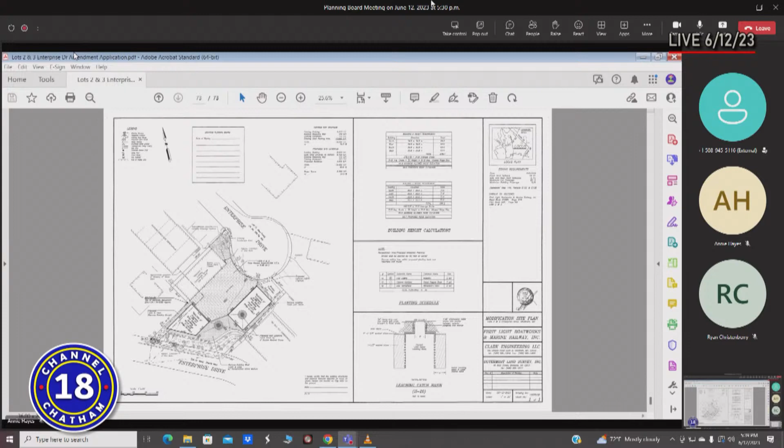I did provide drainage calculations. We are adding a couple of drainage structures because we're increasing the impervious nature of the entire lot, and those are strictly there to handle the runoff from the 2 new buildings.

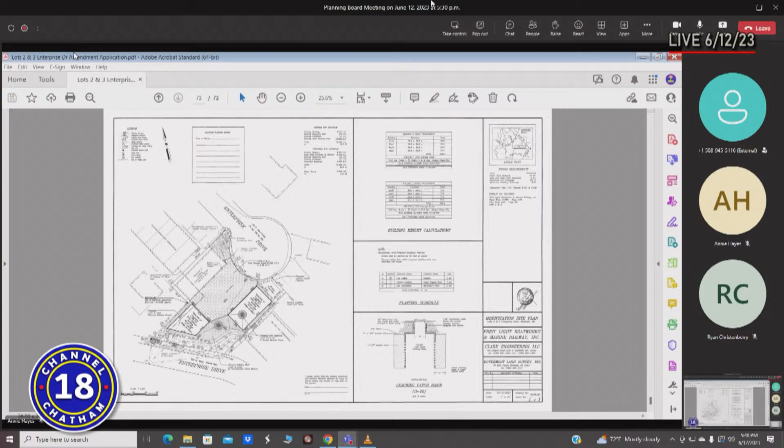I think I spelled out all the criteria in my cover letter, so I won't have to repeat that, I hope. But I'd be happy to answer questions, and again, Jim's here to answer any of the operational questions.

I see Bob Dubus has a question. I also have a question, but Bob, did you want to go ahead? All right, yes. Sorry, I keep forgetting, your letter was very complete and very much appreciated. I have a couple of questions, and then we'll see, there may be board members who have questions.

Could you just show us graphically, you made a comment that the building coverage is increasing because you're adding a building, but the lot coverage is decreasing because you've added the other lots. But can you just show us how that's working? I'd just like to see it really clearly.

And were these additional lots under the same ownership, correct? They must be, yeah. Yes, okay.

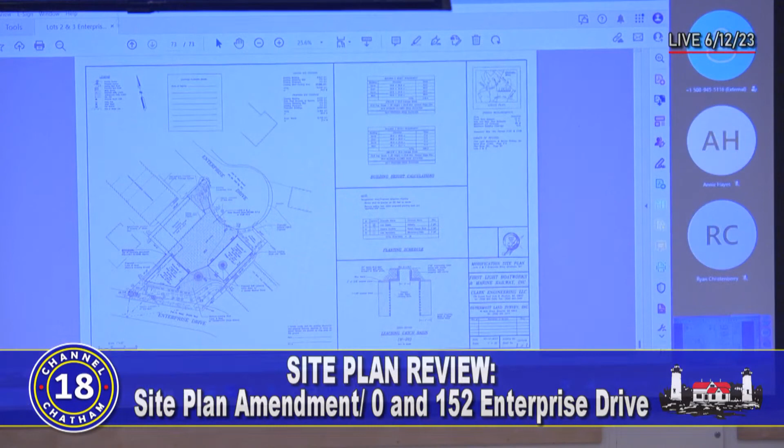So in the industrial district, there is no criteria for building coverage. Right. So there's the new building that's more than what was on the original site plan. All of this area was proposed to be gravel, and this boat rack is actually a little smaller, I believe, than what was on the original permitted plan.

This is the retaining wall that was installed. Due to the neighbor's building, they couldn't get that close to the property line and not undermine their site. So they got as close to Enterprise as they could, and as close to the neighbor on this side.

But can you just show me which are the two added lots that were not part of the plan before? The lot line is maybe not shown on the plan. I think it goes diagonally across. I can't remember, I might have the old site plan here. I didn't think I was imagining not seeing it. It's possible I imagined it, but I didn't think so. Just so I like to understand it, that's all.

The lot line goes there and then kind of to that building corner.

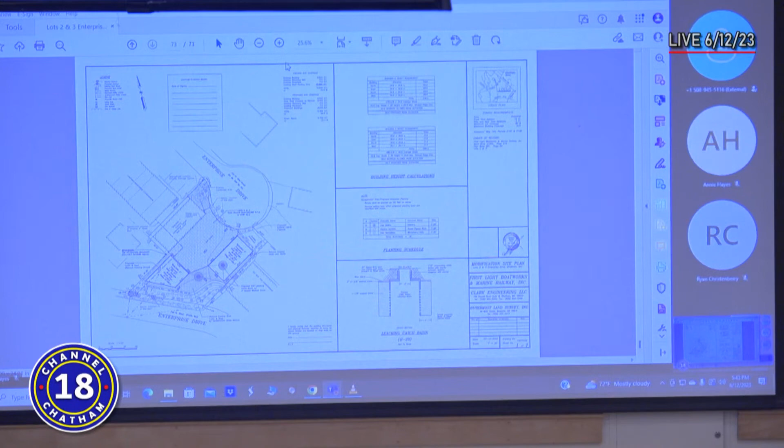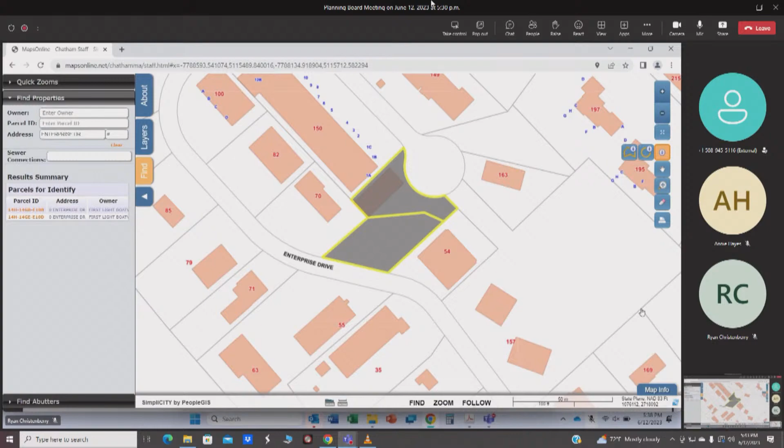I had another question. This is sort of a technicality, but I wanted to understand about the retaining wall, because you made a comment that it was not built according to what was shown on the original approved plan. If something is done differently than what was approved, we need to review that and give our approval now. So I just want to understand clearly what happened.

I can speak to that. If you want to put the plan back up - I didn't think I was involved when it was constructed, but I didn't think you needed permission to build a smaller retaining wall than what was approved. You actually do. Really? I think that's one of our standard conditions on every site plan, that any deviation from the approved plan means it's not the approved plan. So yes, that means you would need to come back to the planning board to get that change approved.

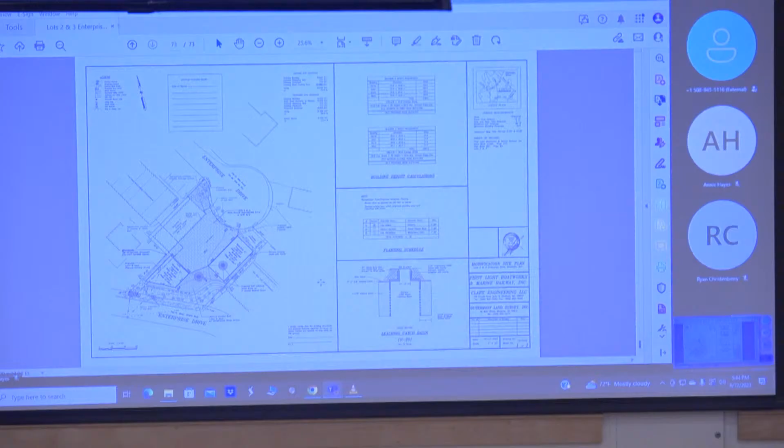We're talking right here in this corner. The original permitted plan showed the wall coming right to the property line here, and then following the property line to the north. At the time, when we were looking to do that, we basically moved the retaining wall further onto our property and further away from Enterprise Drive to make it less of an extreme situation. It was going to require a 20-foot sheet pile to hold up Enterprise Drive, and it was just too expensive. So at the time, I did speak with Jay Briggs about that, and he approved that change because we were moving it further away from the road and adding more green space.

So you did build the retaining wall, you just changed its location. Correct, somewhat. We basically built it as planned as far as the structure itself goes. Okay, all right, that helps.

Can I get other questions from the board? Bob Dubus, did you have questions? I'll let the board go through and see if some of mine are answered. Arthur, do you have questions?

I did go out and take a look at the site. The materials and the structure for the retaining wall are identical to the original plan. There was an alignment change on it, so, as part of our process here, we can incorporate that as part of an approval. Yes, I didn't see any issues with it. It's a very sound wall. Your stormwater is right up to date.

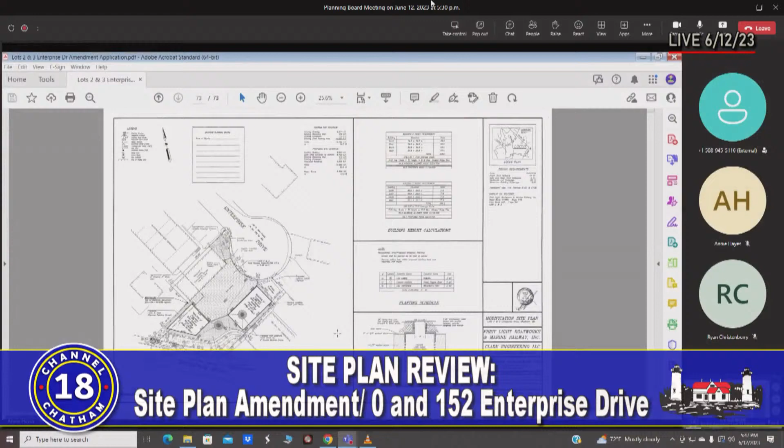When I was over there inspecting or looking around, notwithstanding the statement that there's no need for parking, there were 5 trucks inside the fence in addition to the forklift. And there's room for them to park, it's not an issue. But I just wanted a little clarification on whether any parking needs to be identified on the plan, if in fact you're going to have 5 trucks parked there all the time.

No, that would be a very rare incident. I think you might have shown up when a larger boat was being moved and they needed some help there. But in general, the vast majority of the time there'll be no vehicles parked there. But when we are moving boats, one to two, it could conceivably be more. But that's the only real parking usage - when we're actively moving those boats.

And just one other clarification for my benefit, on Enterprise Drive - Outermost Harbor Marine has a building up on Enterprise Drive that's sort of sitting near your retaining wall, I think, right? That's not part of your business, correct? That's, I think, at least partially owned by Bill Marsh, the red building there.

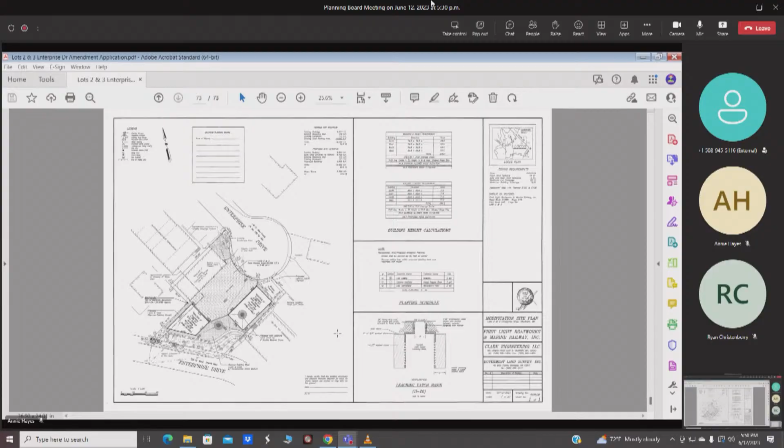That hydrant that's across the cul-de-sac is fed from up the hill. But if you look really carefully, you'll see a trench of about maybe 120 feet where Mr. Marsh and the people that own the big blue building had to extend it, because somebody bought the lot next door and there was a water main in the middle of it.

So it comes from the hydrant going down Enterprise Drive, or going back up Enterprise Drive. It goes as far as Scotty's old place. Yeah, that's what I thought. So then the hydrant -- you can ask the guy that knows sometimes.

Only pulling your leg. Now, but I do have one thing that I've been waiting a long time for, and that's when you have these buildings done, you will have an apron where you drive from the circle out or in, okay? An asphalt apron. Correct, over there. It was in your to-do list the first time, but because you never finished it, we could not say too much about it.

But now you're going to finish it, so please put an asphalt apron in. Understood. Thank you.

All right, yes Arthur. Just one other thing, David. I don't know how tall Building 2 is, but the overhead electrical service, Building 1 cuts across it. So these are tall buildings, at least Building 1 is real tall, so I don't know if there's going to be a conflict there and if that's going to be relocated. If that's the case, just show where the new service is going, okay?

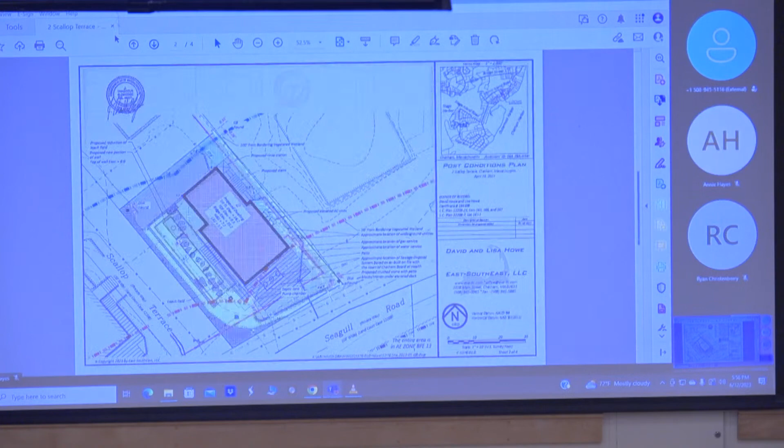Did sheet 4 make it? I don't think so. Yes, I believe it did. There is an old driveway, a road of some kind. It doesn't appear on the land court plans. We're not sure what happened out here way back in the day. It's mostly broken asphalt, with some larger pieces.

The proposal is to remove that as part of conservation mitigation. Nobody is parking there anyway. They will park there during construction, and then it's basically restoring the area back to a path. Not sure if you need to comment on that one, but it is a benefit to the environment, getting rid of some old asphalt that was there a long time ago.

Mr. Dubus asked: Ed, is that their property, where that driveway, where the old road is? Is it owned by that one house, or shared? They own this section and they own this section right here, where Horn used to put all his boats and storage gear many moons ago. So they own it, that's good.

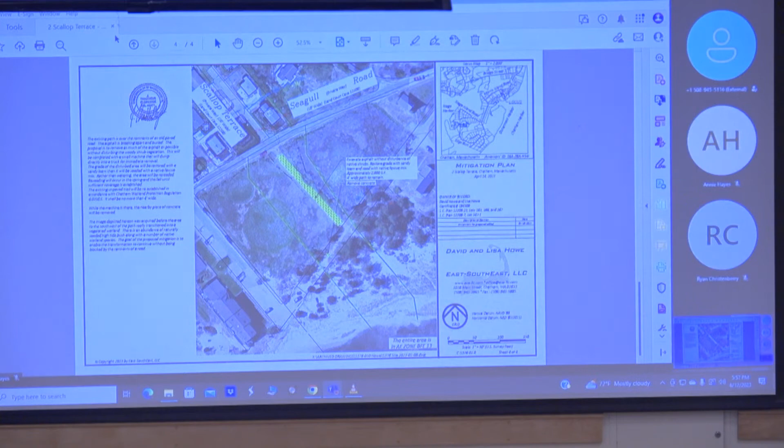So they'll take that out and let it go natural? Yeah, a little bit of regrading with some sandy loam and grass seed, and there are plants. We're not going to take out the section here because it's broken and there's substantial vegetation growing through it. The rest is just grass growing on top of an inch or two of sand that's blown in. That's good, that'll clean it up. Good, thank them for us.

Any other questions for Thad about this particular project, Arthur? I went out there and took a look at this, and I agree that adjusting the driveway width entrance makes an awful lot of sense.

The criteria in the bylaws says the construction and maintenance of a driveway of minimum legal and practical width. The width that was on there, I'm not even sure if it was 6 feet, so that's really not practical. The adjustment, with the change in the location of the wall, provides I think 9 or 10 feet. That would be certainly a practical width, so I think they meet the intent of what the bylaw says. Great, thank you, Arthur. Anyone else?

Any other questions? Then I would propose, may I have a motion that we send a positive recommendation to the Zoning Board of Appeals regarding this driveway in a conservancy district. I couldn't think of the word, change - it's not really an addition, it's not much of an addition. A change in this driveway in the conservancy district. May I have a motion?

I move that we send a positive recommendation to the zoning board regarding this alteration of the driveway. May I have a second? Art Sprue, I'll second, and include the removal of that. Isn't that part of the recommendation? We approved the gravel, the old asphalt removal? Oh, are we approving that as well? I would like to add that as part of a comment. Yeah, all right, we can add that comment.

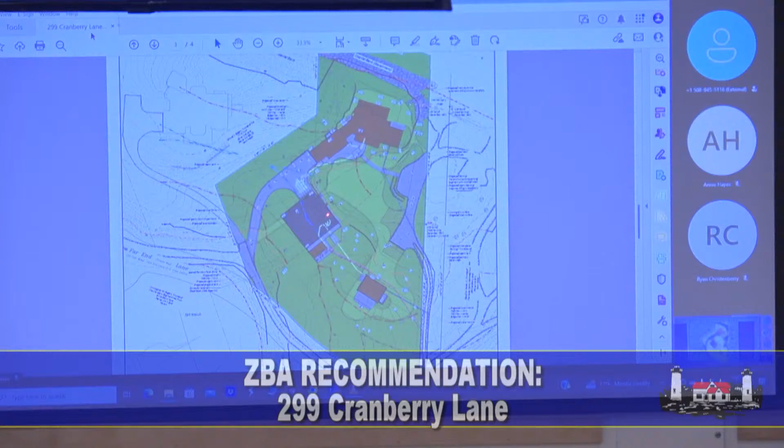We have a property that's not completely in the floodplain. We have a floodplain that comes through, so this section of property is all in the floodplain, and on the other side there's a bed. The proposal is to rebuild the house. The house is currently within the floodplain; we'll be pulling it out just by a few feet.

The existing driveway that's down below, they would like to keep but change slightly. They're proposing to put in grass pave at this bend so they can turn around. There's no formal turnaround at the end of Cranberry. They would like to access their garage and building, and we had the choice of either coming through the middle of the property, through a lot of floodplain, or coming off of Far End Lane and zipping in. That's the shortest section through the floodplain in order to access the house directly.

This is a little steep, so we've been proposing a pervious paver, and then it's shell above, and down here it's dirt and shell stone - basically what's out there now, a little more formalized.

I believe stone is the preferred surface. So I just want to ask you, so they're basically adding a second driveway, but can you show us with the pointer the section of this second driveway that's actually in the floodplain? That little bit there, probably about 15 feet.

The existing dwelling currently exists in the floodplain here. They're taking that out, restoring the bank, and then building the new structure outside of the floodplain. Okay, I'm fine with that, I thought it was in the floodplain.

Board member: The original driveway, do you enter in the southern portion of it and come up? Enter through right here. What is at the northern end? It looks like it keeps going into the next property, or? It does. Woody Foster has his driveway that comes over, and it does loop back around.

Is that practical? I was thinking that we would take the 10 feet that we're giving you over here and take 10 feet off that northern end there, and just make it a little bit more so you could come in, turn around, and go back out.

Let me interrupt you for a minute. The people that live down there live close-knit. They were not huge places at one time, they were small places, and over the years they grew. Everybody down there knew everybody, and everybody drove wherever they could drive. It's like a little campground, that's about the best way to describe it. They're all individual little campgrounds.

Everybody knows everybody, and everybody drives to everybody's place, and it's tight down there if you went down there. At our on-site with conservation, we had a dozen neighbors with us. It was one of the best-attended conservation on-sites that I've been to.

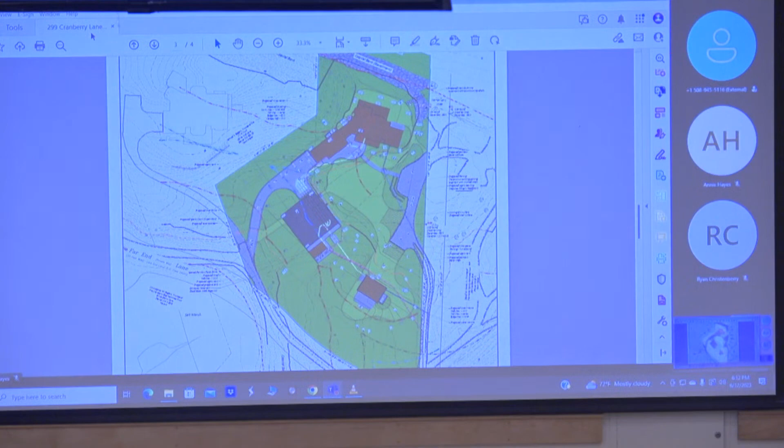Again, the alternative for one driveway would be coming right through the middle of the property. Essentially what we're doing here, strictly speaking, in our recommendation to the ZBA, is allowing for a small section of driveway to be built in the Conservancy District to the west. We're saying we're okay with that in this particular case.

Maybe there are two reasons. One is because the rest of that driveway is not in the Conservancy District, and it's certainly better than any alternative that was presented. The reduction of the paved area for the tennis court is a plus, but strictly speaking, the tennis court is not under our jurisdiction.

I think it's probably better to just say that's the only driveway, and that other thing that may be a road is just the road. There really is only one driveway into that property, and that's why we're approving it. The other thing is, I don't know, is it a driveway?

They described it more as a road that people drive around. It's barely there. All right, we're talking about the one on the east. We're gonna approve this driveway.

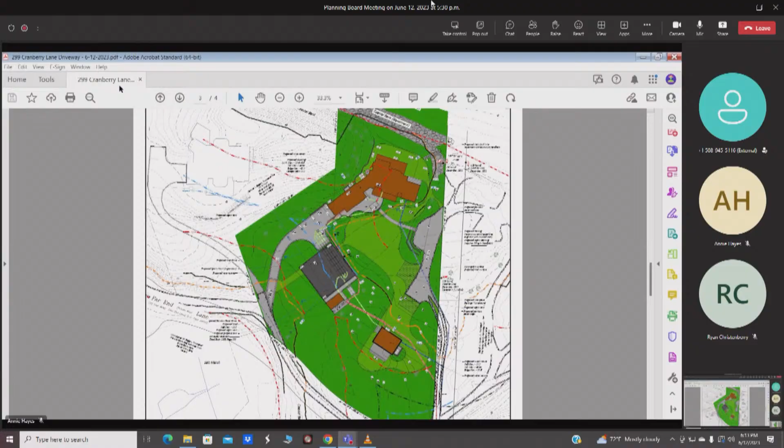Let's not dwell on this too long. I'm gonna ask for a motion, which includes our standard wording that driveways are constructed such to allow for the unobstructed flow of water and pervious material, and I'd like to ask for a motion for a positive recommendation to the Zoning Board of Appeals about this plan.

May I have a motion? Charlene's not here, so you're leaving it all to me. I move that we send a positive recommendation to the zoning board for this small piece of secondary driveway. Thank you, I'll second.

Bob Dubus seconded it. Bob Wirtschafter, approve. Art Spru, approve. Warren Chain, approve. Megan Story, approve. Bob Dubus, approve. Catherine Halpern, I also approve.